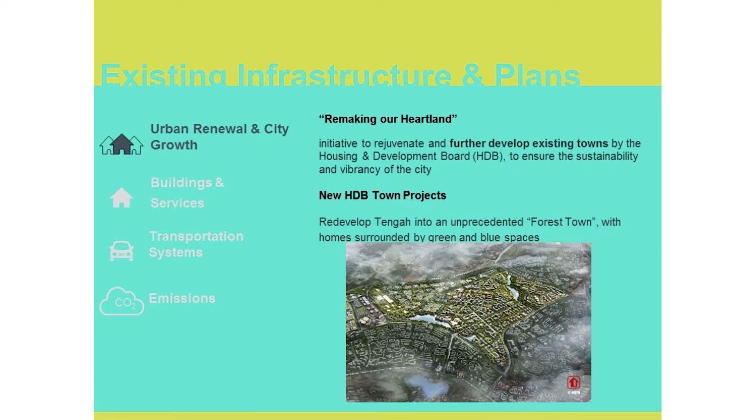So here are some of the existing infrastructure and plans in place today. In terms of urban renewal and city growth, many initiatives are catered towards rejuvenating and redeveloping existing towns and estates to more sustainable and greener standards, with the Remaking Our Heartland initiative, as well as new town projects. One that's gotten huge media attention is the redevelopment of a precinct called Tengah into an unprecedented forest town, with a vast, immense amount of green and blue spaces within that built environment.

For building services, they currently have the BCA Green Mark scheme, which is synonymous with the LEED certification in North American cities. As time moves forward, the policies are becoming more stringent and strict in order to become a more sustainable city.

With transportation systems, roads account for 12% of the city's land use today, which is almost as much as housing at 14%. Moving forward, the Singaporean government actually wants to reduce the amount of transportation infrastructure projects being built. A lot of that policy is catered towards increased use of active modes of transport as well as public transit.

In terms of energy, Singapore has a target to reduce its emissions intensity by 36% from 2005 levels by 2030, and to stabilize that. A huge player in achieving that is improving energy and carbon efficiency, done through four strategies: achieving 75% use of public transport by 2030, achieving BCA Green Mark standards for 80% of all buildings by 2030, reducing plastic incineration, and improving energy efficiency in desalination and used water treatment.

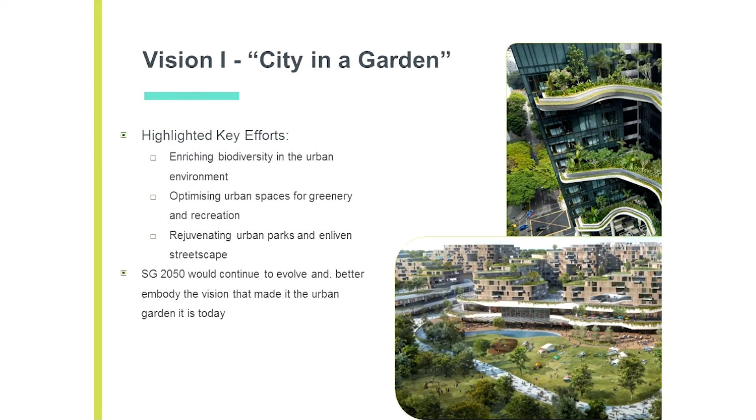Now to Justin. Our second vision is to reduce energy consumption in Singapore. We want to implement passive cooling technologies, since Singapore does not require any heating at all—it only has over 3,000 cooling degree days. So by using less active cooling, you reduce energy consumption. We took ideas such as net zero energy buildings from the SOLAR XXI.

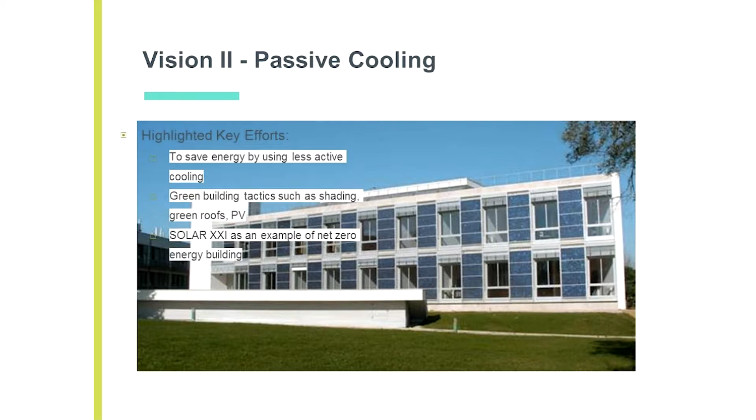Moving on to the infrastructure design, let's start with buildings. Our 4 key strategies would be, as I said before, passive cooling. We want to have green roofs, reuse gray water, and also implement low energy fixtures and appliances.

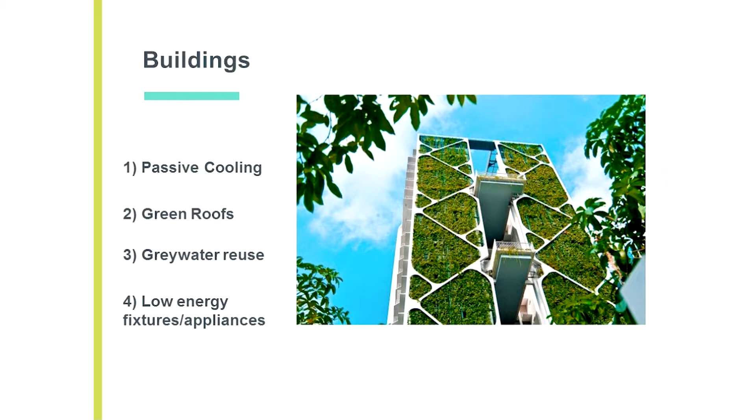In a standard building, over 3/4 of energy consumption is by major appliances such as the AC, hot water, and the fridge. For all the upcoming new buildings being made, if we were to just use simple passive design such as having shades, it is expected that you can have up to a 40% reduction in energy consumption.

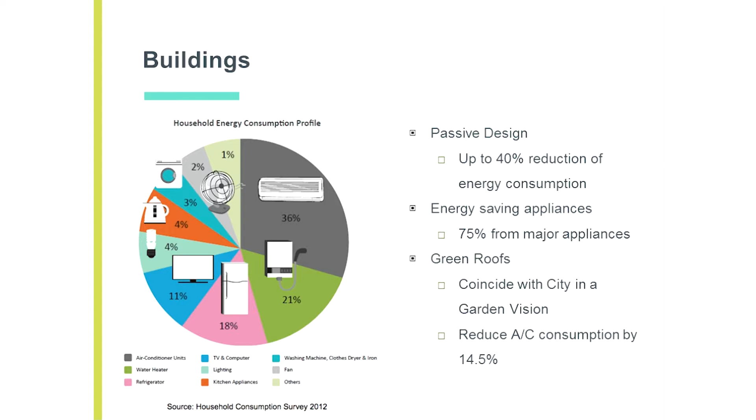By implementing these green roofs on all these new buildings, this not only coincides with our vision of a city in a garden, it's also proven in Singapore that by just having green roofs at the top, you would reduce the AC consumption by 14.5%.

As for the other aspect of buildings, we want to focus on the water consumption of Singapore. This is two major concerns in Singapore in general. First is the high consumption of water—in Singapore, an average person per day would consume over 280 liters, which is pretty high compared to other Asian cities. The other is that Singapore is really dependent on imported water and has a huge concern from water scarcity, since over 1/3 of its water is being imported from Malaysia, and every year this imported water is costing them more and more, which is why they want to be more independent.

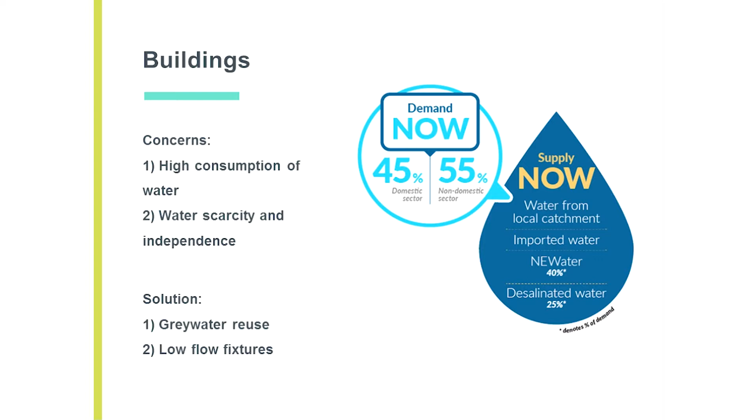To counter these concerns, the two solutions we propose for these buildings would be the reuse of gray water and implementing low flow fixtures. As some other groups have already said, the benefits of using gray water systems would reduce domestic water use by up to 40 gallons per capita per day, resulting in Singapore households a reduction of over 54% of domestic water. This gray water could also be used for irrigation for the green roofs of the building itself. By just simply implementing or upgrading low flow fixtures such as aerators, we can reduce water consumption by up to 30%.

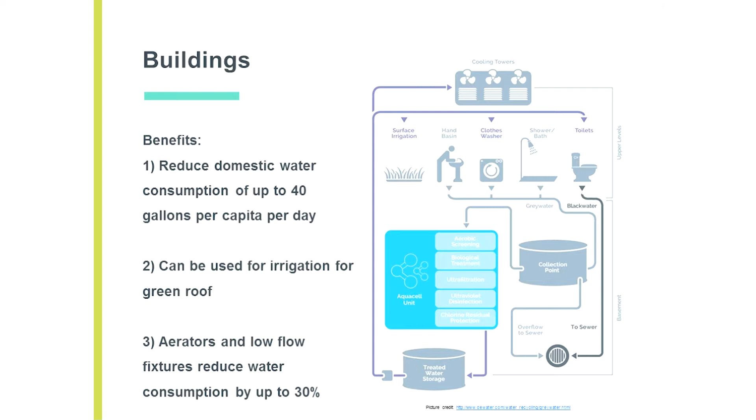And I'll pass on to James to talk about transportation. There's a lot of actions being taken by the Singaporean government and the public to address transportation issues, but the three highlighted today are that we believe Singapore 2050 would have a car-lite infrastructure with an integrated transportation network and low-carbon fuel vehicles.

With that same philosophy, they're trying to incorporate that vision into other aspects of the transportation infrastructure, incorporating complete street elements, making it more public, pedestrian-friendly and cyclist-friendly, increasing the rail network line to double its capacity, as well as the inclusion of more car-free town centers in future towns.

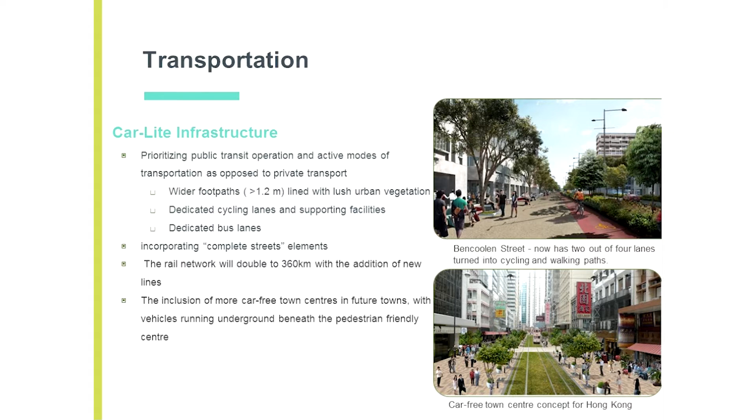Next is the integrated transportation network. This would include integrated transportation hubs, meaning interchanges that seamlessly link to other stations and stops, as well as adjoining commercial developments. There's an example of this being designed in San Francisco. Basically, in doing that, we connect riders and commuters to different modal types of transport, and kind of solve the first and last mile issues in transportation.

We also look beyond public transportation, toward public-private transport collaborations to form strong intermodal partnerships with taxi, car sharing, and bike sharing providers. With strong partnerships between different modes of transport, we believe Singapore would be able to connect commuters from one mode to another, and incentivize people to use more sustainable modes of transport other than private vehicles.

Another initiative being undertaken is low carbon fuel vehicles. Right now they're testing the viability of electric vehicles with an initiative called BlueSG EV, which is a car sharing initiative. They're testing it out so far, and we believe that if it proves viable, it would be a huge player in transportation infrastructure in the future.

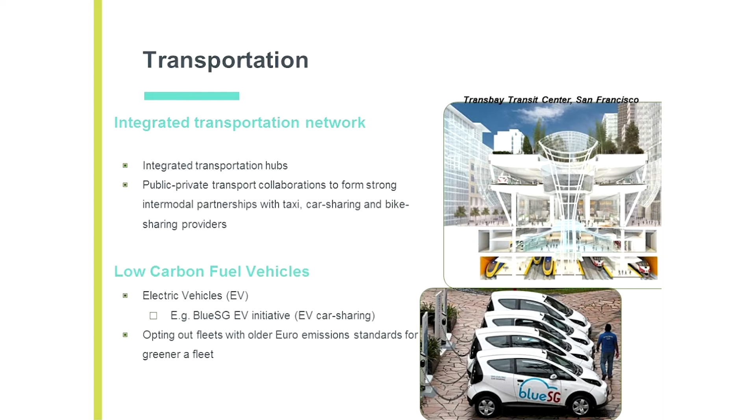Other than that, some of the buses in Singapore now are not within the current Euro emission standards, and opting those out for a greener fleet would significantly help GHG reduction in the transportation infrastructure.

All in all, we believe that with public and private partnerships, if ride-sharing were to replace all conventional traffic by 2050, we would decrease the number of private road vehicles on the road by 90%, or 65% during peak hours. And by 2050, we hope 85% of trips will be made on public transport. Currently it's 66%. Passing that to Justin.

So for land use in Singapore, our 4 key strategies are: reclaiming additional land, development of some current reserved land, intensifying new developments—meaning we want to build vertically instead of horizontally—and recycling land with lower intensity uses to achieve higher land productivity.

Another important point for land use is that we want to connect all the different parks and also the rail lines to the bicycle track, so we could promote more active transport.

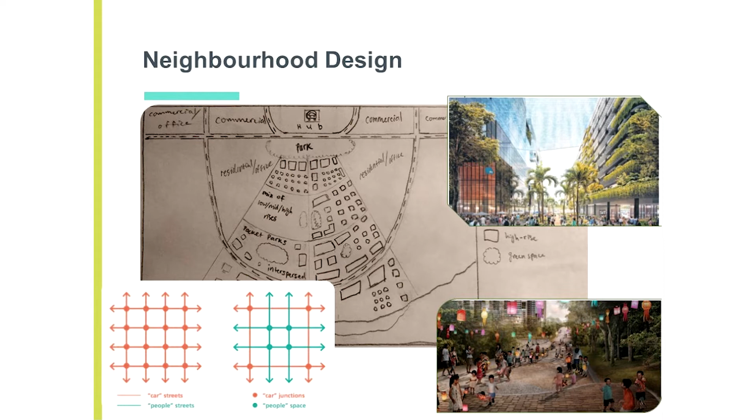That meaning their main road infrastructure circles around the perimeter of another block, centered around pedestrian and cyclist friendly nature and culture. So it's a system of high-rise with low-rise buildings, and walking trails in between the buildings lined with urban vegetation and greenery, the walking entrance trails, as well as super blocks having people space in the middle, as well as car junctions all around.

Next, for the energy consumption or electric generation in Singapore, currently it's mostly 95% natural gas, with a little bit of fossil fuel and a little bit of solar.

The rough estimation for 2050 based on some current existing research shows they could have renewables, mainly solar, up to 25%, with natural gas at about 75%.

In terms of water supply, I think Justin mentioned it a little bit earlier - 40% is by NEWater, desalinated water.

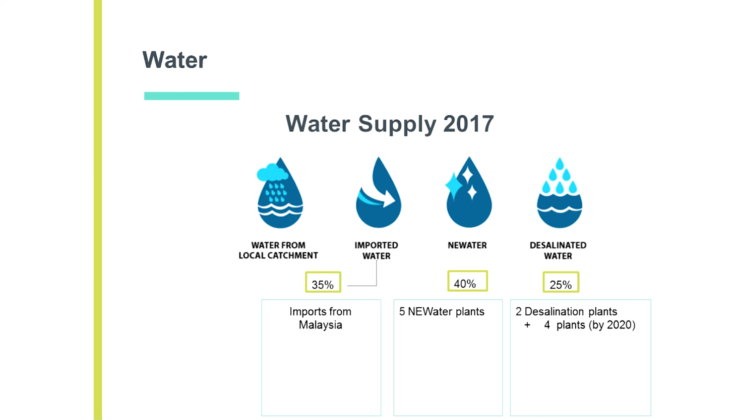For 2050, we tried to tip the balance a little by adding one more NEWater plant, a wastewater treatment plant, and one desalination plant to reduce reliance on Malaysia's imported water. A key strategy is to maximize rainwater harvesting, ways of recycling water, and desalinate even more water.

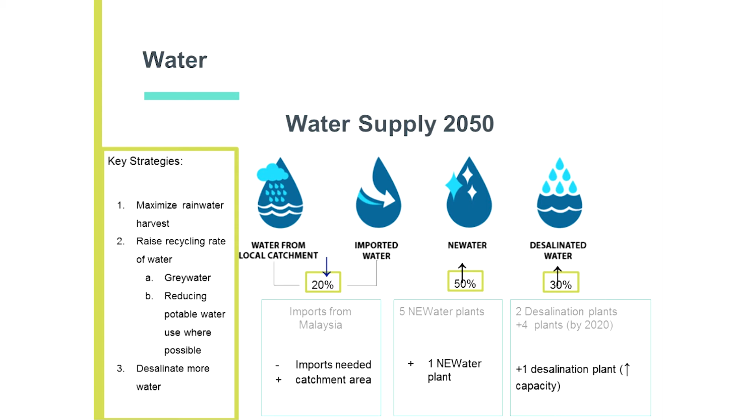Other than that, there's also managing the demand side, tackled through pricing measures and other encouraging water conservation practices to incentivize better water consumption ethics.

As for wastewater, we didn't touch it since the current infrastructure is already capable of meeting 2050 demands.

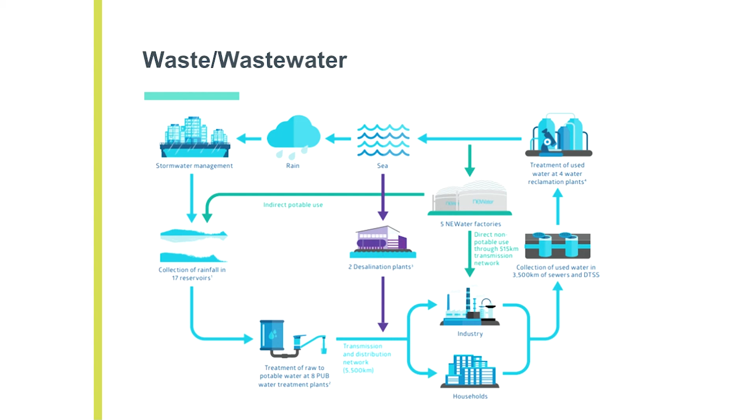But as for solid waste, construction materials have a high recycle rate, whereas domestic waste is really low, below 20%. Our two main strategies are using the public waste disposal idea from Taipei, to reduce consumption by forcing a change, and the other is about a digester, an idea taken from Sacramento, California.

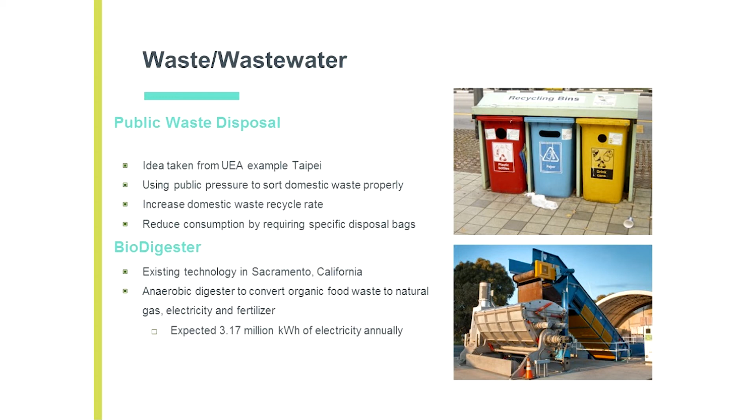The digester converts organic waste to natural gas, electricity, and fertilizer, helping relieve some of the energy demands. As for emissions in general, it is sad to say that our design cannot meet our targets.

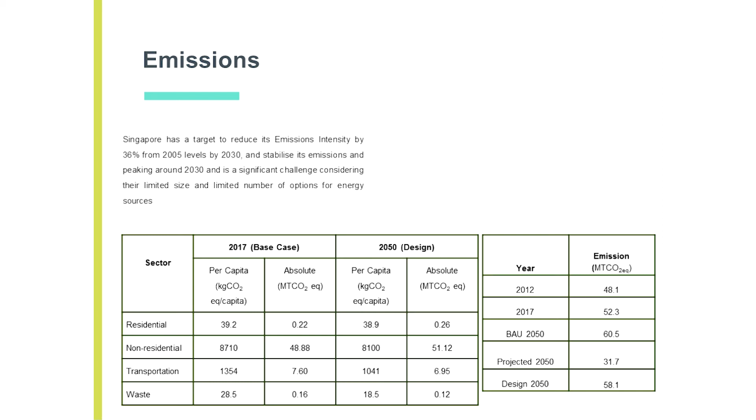This is massively due to 90% of our emissions coming from the non-residential sector, mostly the industrial and energy transmission sectors, which is out of the scope of our project, so we couldn't really change too much.

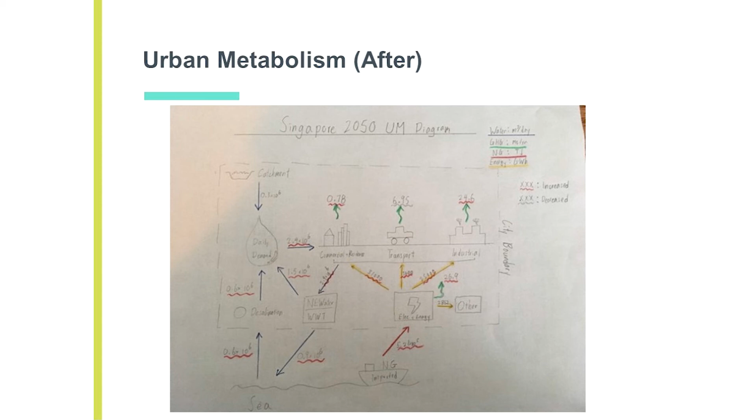As for urban metabolism, these are simple drawings of before and after, and you can see that mostly all our consumptions went up except for the transport sector, since we have a decrease in private vehicles and an increase in public transport.

We tried our best to address some of the SDG 11 targets, mostly through transportation systems, through expansion and revitalization of public transportation infrastructure, and developing more car-light infrastructure, protecting natural cultural heritage through preservation of green spaces, access to safe and accessible green and public spaces through more green spaces and development of more inclusive town hubs, as well as addressing air quality and municipal waste management, closing more loops for solid and energy, and introducing new facilities such as biodigesters.

In conclusion, Singapore is an extremely green city, with a lot of limits such as limited land use and renewable energy limits shaping our different ideas. In the future we would want to look into nuclear technology, which currently right now politically and socially is not as acceptable, but we hope that it will be more so.

It could be implemented after 50 years, so then we could massively reduce energy consumption and greenhouse gas emissions. Thank you.